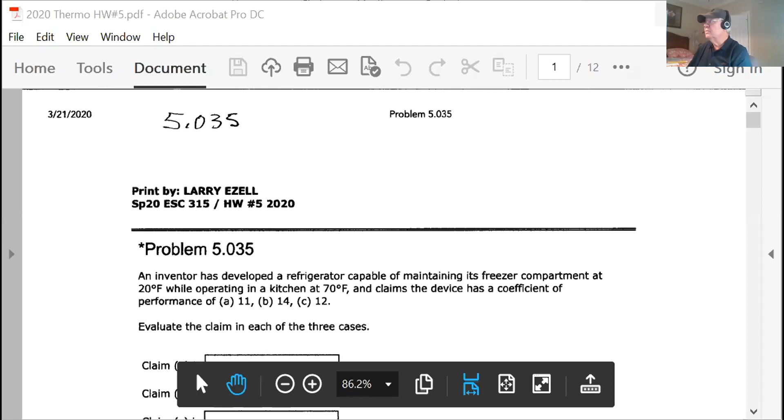Let's see if I can share a screen and share this. Okay. So here's the homework. And like I said, this homework is not hard. Let me move my face down.

By the way, if I didn't say it, I hope everybody is safe. All your families are doing well.

These are not really hard problems. There are a few gotchas because of the sign convention. It's a little bit unwieldy sometimes. So we'll talk about that a little bit. So here's problem 5.035. I'm not working them out, I'm going to go over them real quick, so you might want to have a paper and pencil available.

And as always, the given information in the problem is going to be a little bit different than yours. But the problem says the inventor has a refrigerator capable of maintaining its freezer compartment at 20 degrees Fahrenheit while operating in a kitchen at 70 degrees Fahrenheit. That's usually a freezer you expect to be a little colder than that, but anyway. And the inventor claims the device has a coefficient of performance, and there are 3 different values we want to consider, 11, 14, and 12. So evaluate the claims of each of these.

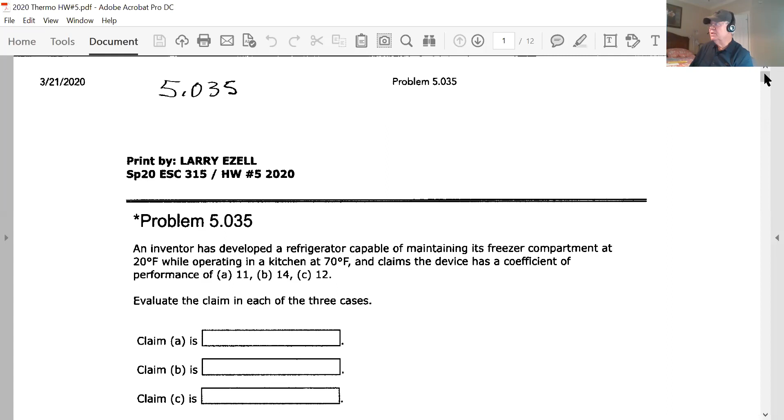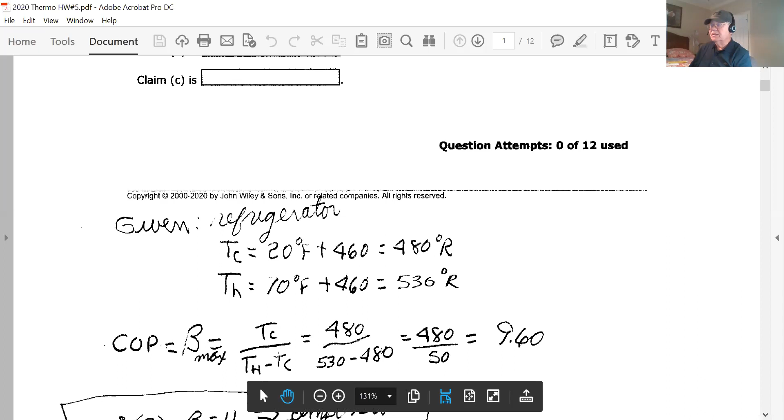So what you do, given the information, you have TC is 20 degrees, at the cold temperature, plus 460. Remember, you've got to get it in absolute. TH likewise is 70 plus 460, or 530. And just apply the beta max. Beta max is TC over TH minus TC. And when you use temperatures, just use the signs exactly like shown in the equation.

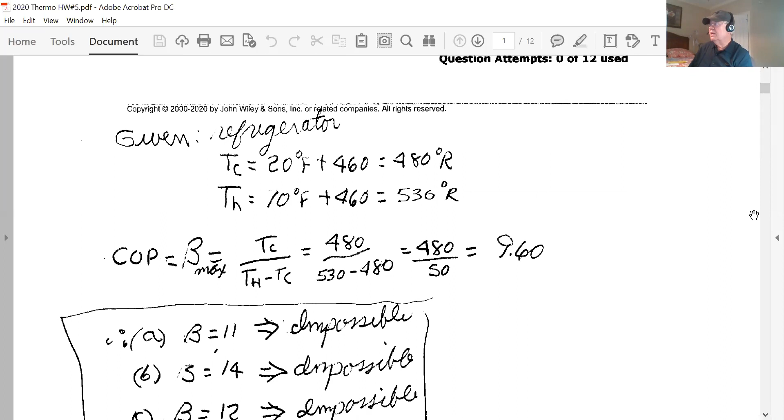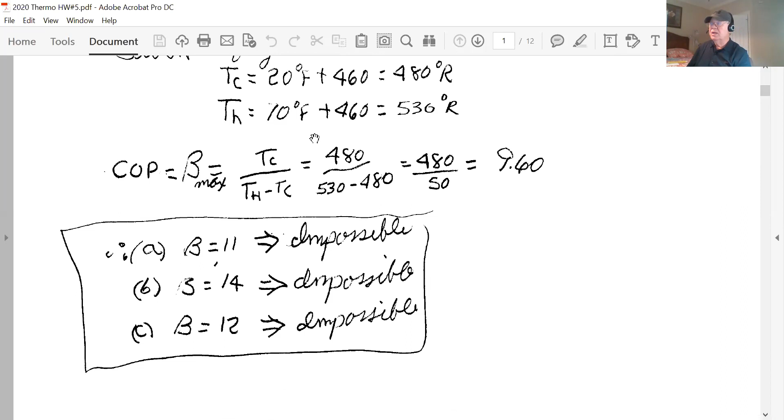So if I solve, now again, on beta max, we use the temperature. These are Carnot temperatures. We do not use the heat transfers. So you have 480 over 530 minus 480, that gives you 9.6 as the maximum coefficient of performance of this refrigerator. And so all 3 possibilities that I was given in my problem, 11, 14, and 12, are all impossible because they claim a performance better than you can get using the Carnot performance. So next one.

This inventor claims to have developed a food freezer that at steady state requires a power input of 0.8 kilowatts. Now remember, always power input, all refrigerators and heat pumps and air conditioners have to have a compressor. And that means you have to put power into that compressor. So all of those power inputs are negative, regardless of what the signs tell you. And I'll mention that a little bit later. So he says that you put in 0.8 kilowatts and you can extract heat transfer from the refrigerated area at the rate of 3,000 joules per second. Of course, that is also 3 kilowatts.

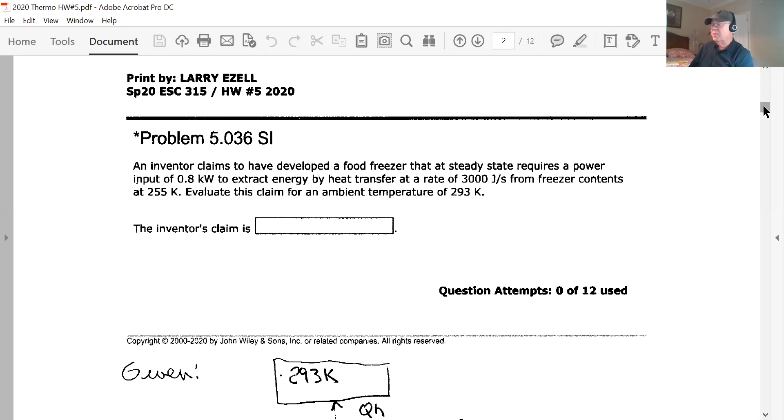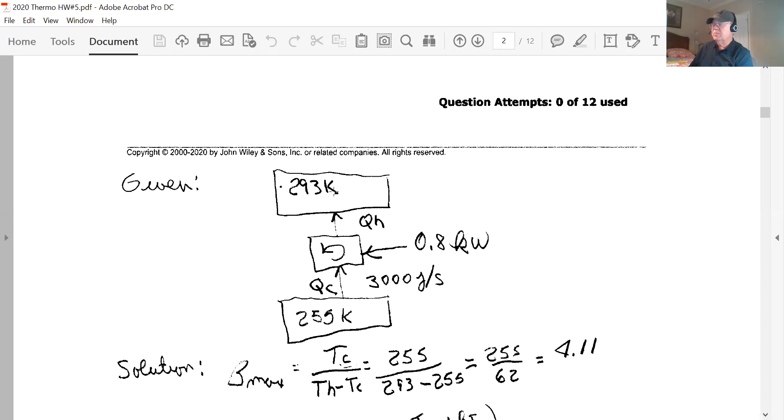And the problem asks you to evaluate this claim for an ambient temperature of 293. I didn't mention on the other problem, but on these type problems, you ought to always draw this little diagram. I call it an energy flow diagram. This is the freezer area. This is the outside area. And this is your cycle in this abstract box. You know you're putting in 0.8 kilowatts of electricity, and you know QC is 3,000 joules per second. That's how much energy you're pulling out of your refrigerated area, going through your system, and then you're going to reject that plus additional energy out to the outside.

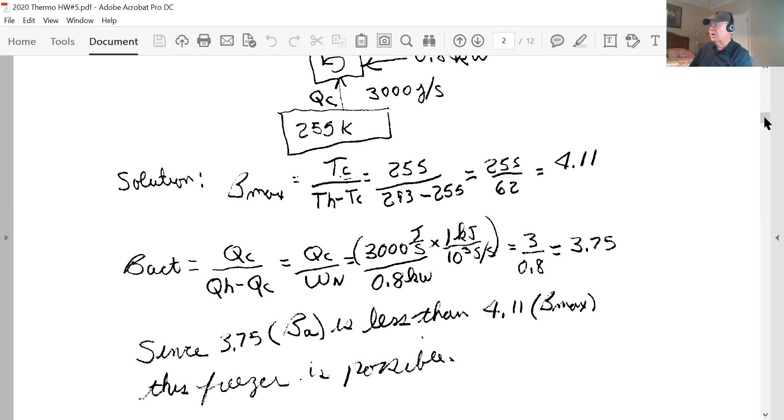So again, let's solve for beta max. You got 255. They gave you the temperatures in K, so you didn't have to convert them. 255 over 293 minus 255. Now, as you know, these temperatures are always subtracted from each other, so they can be in degrees centigrade if you want to. But you go through and you get a beta max, using temperatures now, not heat transfers, of 4.11. Now, that's the best you could possibly get.

So what is your actual? Well, your QC, the heat you pulled out of your refrigerated area, is given as 3,000 joules per second, which is actually 3 kilowatts. QH minus QC, which is also equal to Q net. Now, always remember, this Q net is minus, and I didn't stick my minus sign here, I should have. But if you use QH and QC, don't ever add the two to get a big numerical number. It's always the difference of these two, regardless of whether you get a minus or a plus for the difference. Always the absolute difference of them. And you weren't given these, but you know work net is equal to QH minus QC.

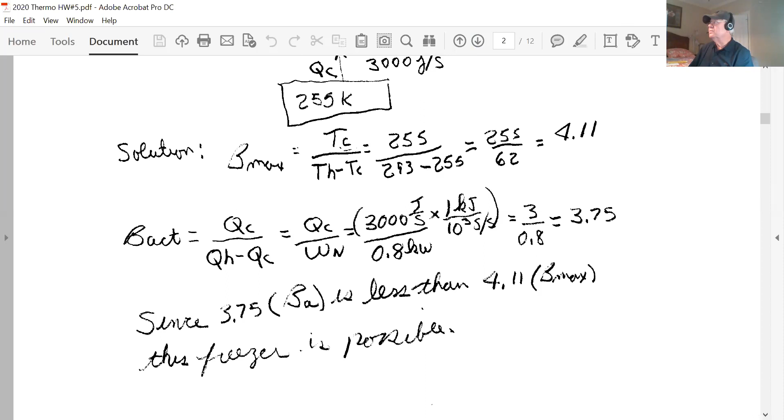And that's because, let me see what I can do here. I apologize for being so poor on this. In any kind of system, the sum of the heat transfers is always equal to the sum of the work in a cycle. So if my heat transfers are QL and QC, then that's always got to equal work net. Now the signs are flaky. You have to take the difference between the QL. That's not right. Sorry. It's QH.

I'll use a capital H this time. QH plus QC is work net. They go ahead and put the minus sign in there, and they'll say work net equals QH. It's confusing, I know. I wish it wasn't like that. But remember, when you use this equation, QH minus QL for work net, it's always the difference of these two. Then the best thing to do is look at your sign, make sure it always comes out with a negative sign. Generally, if you use QH and QL with the sense that we always use, that Q into the cycle is plus and Q out of the cycle is negative, you'll come up with the right value of Q net, but not always. We'll talk about that later.

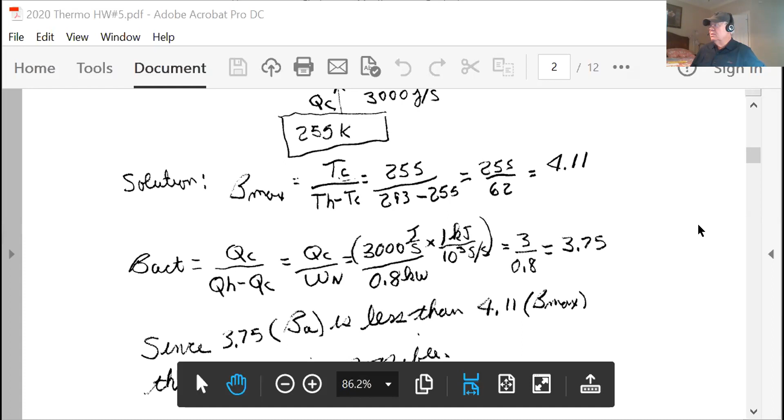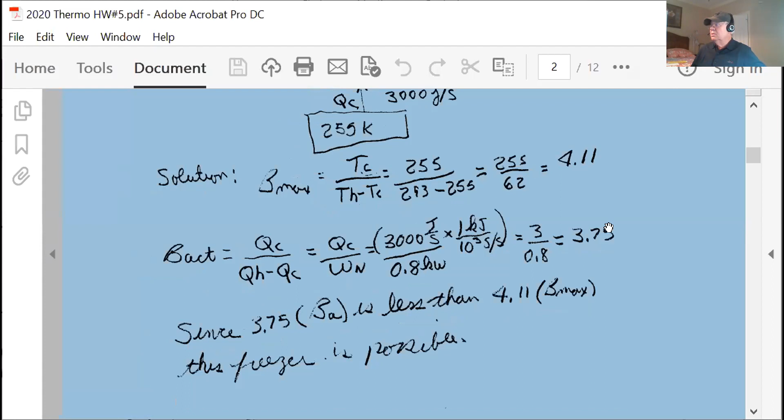All right, let's go back to the homework problem. So plug that in, and I get the actual beta. And remember, it's an absolute value, so you don't have a sign, just put your absolute signs if it makes you feel better. And you get 3 kilowatts over 0.8, or 3.75. And since this beta actual is less than the beta max, then the system is very possible.

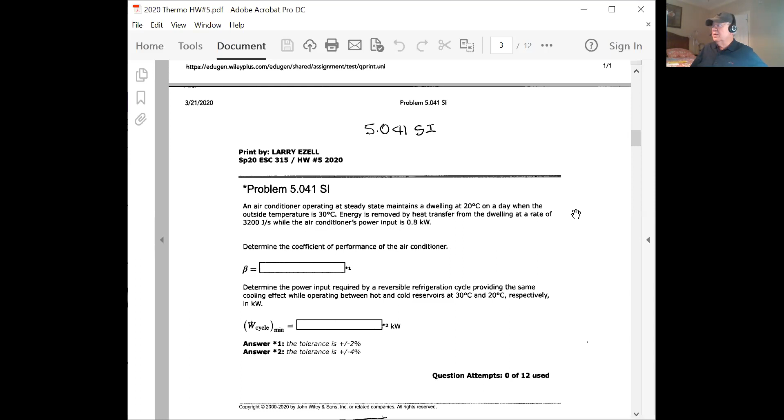Next problem. An air conditioner operating at steady state maintains a dwelling at 20 degrees. So what's 20 degrees? 20 times 1.8 is 36 plus 32. That's 68 degrees F. A little on the cool side, but okay. Energy is removed by heat transfer from the dwelling at a rate of 3.2 kilojoules per second, while the air conditioner power is 0.8 kilowatts. It sounds a lot like the other problem, doesn't it? Determine the coefficient of performance of the air conditioner. So again, these are easy problems.

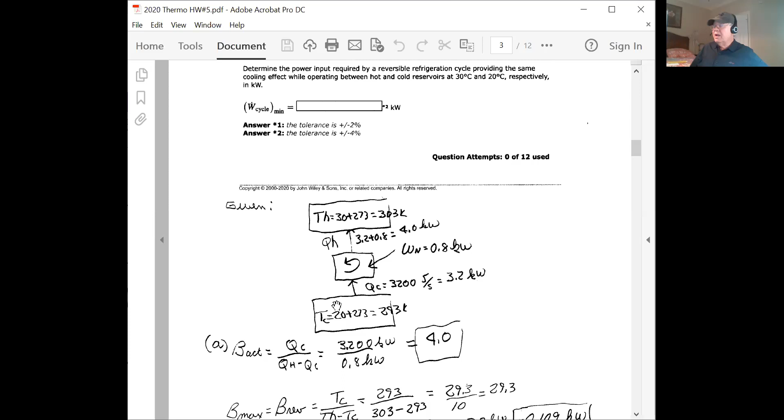Let's draw a little heat flow diagram. I could have been a little neater, could I not? So here's our cycle. Here's the heat we're pulling out of the air-conditioned area. Air conditioner, yeah, okay. So we're pulling heat out of this area and cooling it, and we're giving this heat off to the outside. And as always, if you pull out this amount of heat, that's QC, 3.2 kilojoules per second, which is 3.2 kilowatts. The amount of heat you got to transfer to the outside is going to be the sum of these, 3.2 and 0.8. All right, let's see if we can get beta actual here.

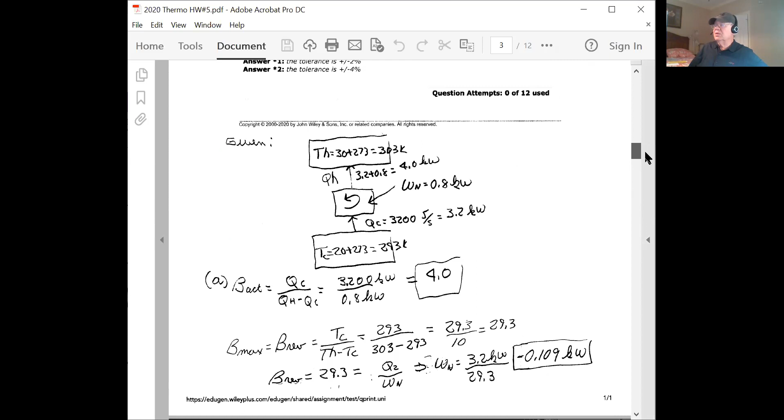Determine the actual coefficient. Okay. All right. So QC was given as 3.2 kilowatts. QH minus QC, which is also work net, was given as 0.8. Now, if I use signage, QC is going into our system, so it's positive. We know work has got to be negative, so we'd end up with a minus 4. But coefficient of performance is always absolute, so it's just 4. Now, I believe the problem also asked you to find the maximum. What did it say?

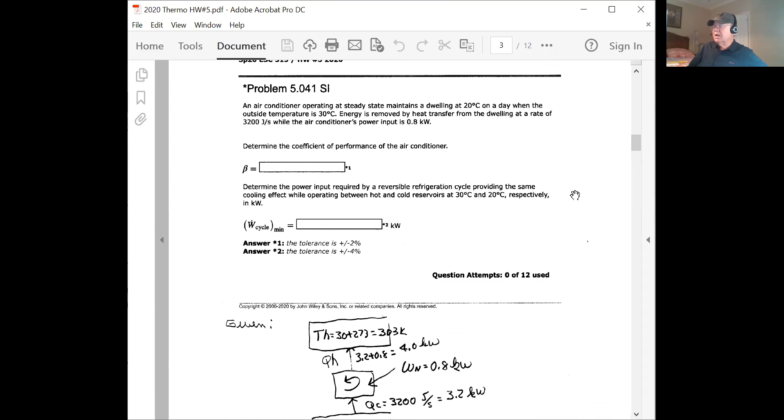Determine the power input required by a reversible refrigeration cycle. Reversible means the best possible case. So what is the beta max? That's also the beta reversible. And again, here we use temperatures. It's an air conditioner, so it's TC over TH minus TC. Refrigerator, TC over TH minus TC. If it's a heat pump, it's TH over TH minus TC. Okay, put in the Kelvin temperatures and I get 29.3.

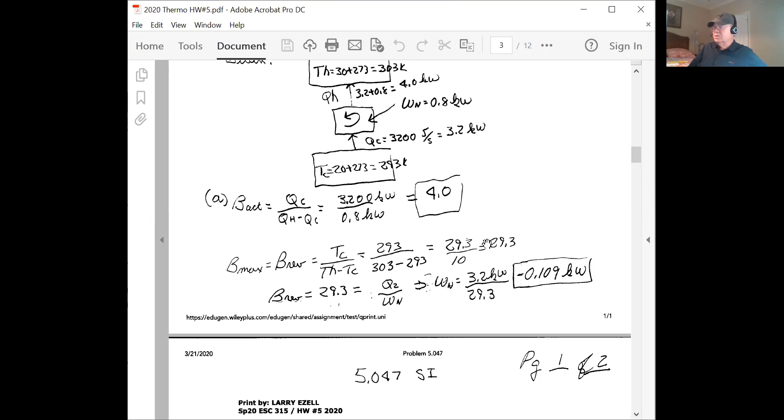Most of these air conditioners and heat pumps in real world operation are not going to be operating anywhere close to the theoretical maximum. But if we could find a fully reversible one that would operate at the maximum, then it asks you how much power you have to put in. Well, the beta max is 29.3, and that's equal to QC over WN. Solving for WN, you get minus 0.109 kilowatts.

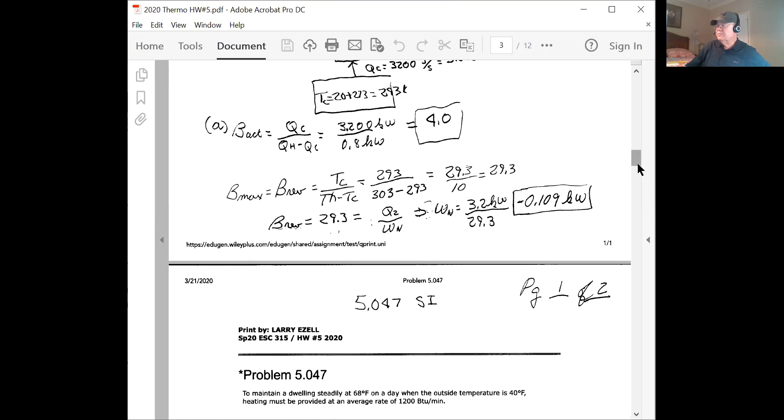Now, when you get this final answer of work, regardless of what sign you come through with, you assign that negative sign. I want to know that you understand that work input to a compressor is negative. Again, air conditioning, heat pumps, the work is always negative. Okay, all right, let's go to the next one. Like I said, it's hard to make these problems hard.

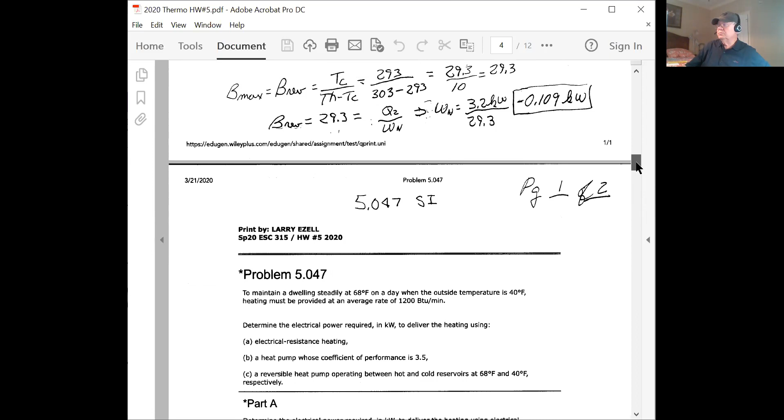Problem 5047. To maintain a dwelling steadily at 68 degrees Fahrenheit on a day when the outside temperature is 40 degrees. Okay, we've got a heat pump here, outside's 40 and we want 68 inside. Heating must be provided at an average rate of 1200 BTUs per minute. What that means is that's how much heat you have to continuously pump into your dwelling to maintain the temperature of 68 degrees.

In other words, the heat loss from your dwelling is 1200 BTUs per minute. So if you put in exactly the amount of heat that you're losing from a heat pump, you'll maintain the temperature. Determine the electrical power required in kilowatts to deliver heat using electrical resistance heating. What we're pointing out here is how much more efficient a heat pump is than electrical resistance heating. Part B asks how much power you would have to put in a heat pump whose coefficient of performance is 3.5. Now 3.5 is absolutely real world. That's typical of a good heat pump nowadays, even higher.

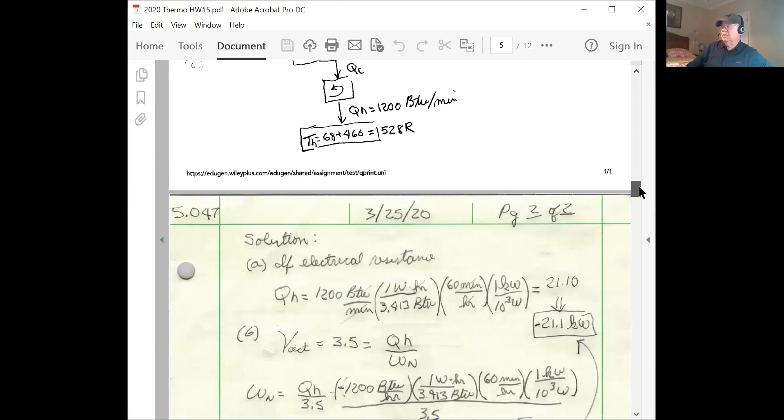QH now is negative. It's going out of the system here, so it is negative heat transfer. So I put the minus sign in there. I really should have put the minus sign right here, because it is heat going out of the cycle right here. Heat going out into the conditioned space.

So if I go through the calculations, minus 1200 BTU per minute, now I get to divide by 3.5, my coefficient of performance. So if I go through this same thing, I get minus 6.03 kilowatts. See how much less energy the heat pump uses than pure electrical resistance heat. Of course, as I pointed out before, the heat pump has some other disadvantages based on what temperatures you're operating at, whereas electrical resistance heat always gives you the 1-for-1 no matter what. So the ratio there, of course, is 3.5.

Now, what about a reversible heat pump? With a reversible heat pump, since it says reversible, that's the best possible, limited only by the temperatures. So it's TH over TH minus TC. And I get 18.857. Well, that's certainly about 5 times the 3.5 of a real system.

Now we're trying to find the work. So we know that gamma max is equal to QH over QH minus QC, which is equal to QH over the net work. We know that net work is negative, so we should come up with a negative answer. And when we do, in this case, we put minus 1200 BTUs per minute for the heat, divided by 18.857, we get minus 1.119 kilowatts. Of course, that's the theoretically possible. Of course, we got nowhere close to it.

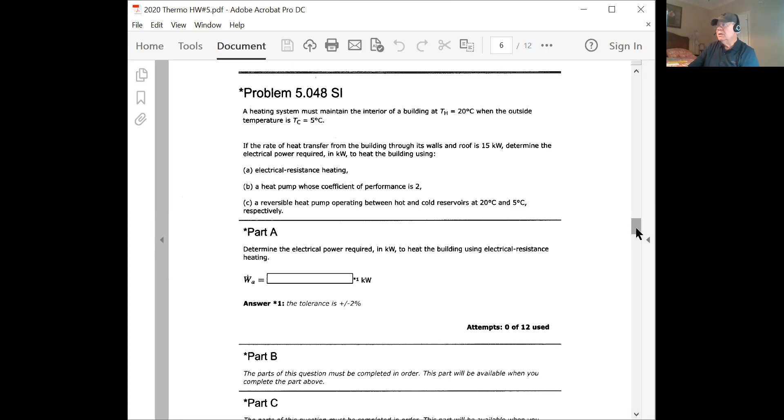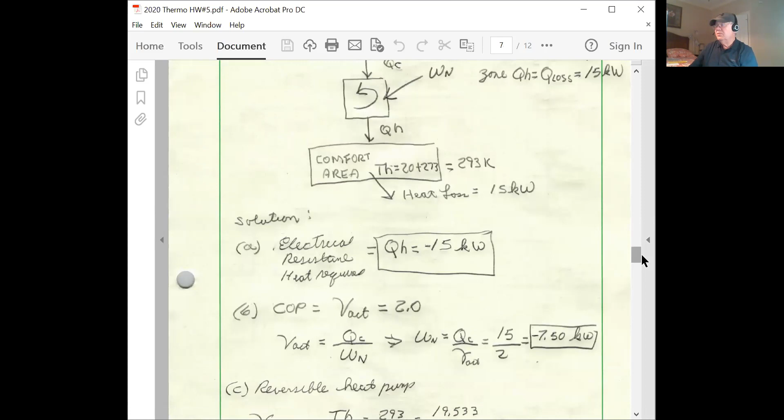So in the same situation, the problem wants to know the electrical resistance heating. Then a heat pump whose coefficient is 2, that's not a very good heat pump. And then the fully reversible Carnot type heat pump. So in part A, it's just 15 kilowatts. It's already given you the heat loss in watts. So the amount of heat you put in is 15 kilowatts. And QH is heat flowing out of the system, so it's minus 15 kilowatts to get the proper sign.

Now, warning, I don't know how Wiley Plus is going to handle your sign. I forgot. I put in all of my signs and I got all the answers right. I don't remember having to change, but if you put in what you think is a right number and Wiley Plus won't take it, then it might be because it needs a minus sign or doesn't need a minus sign. So 15 kilowatts, here's a little diagram. 15 kilowatts going out, you need 15 kilowatts coming in from your heat pump. If you're heating it with resistance heat, then it's 1 watt of heat for 1 watt of electricity. So you need 15 kilowatts of electrical energy.

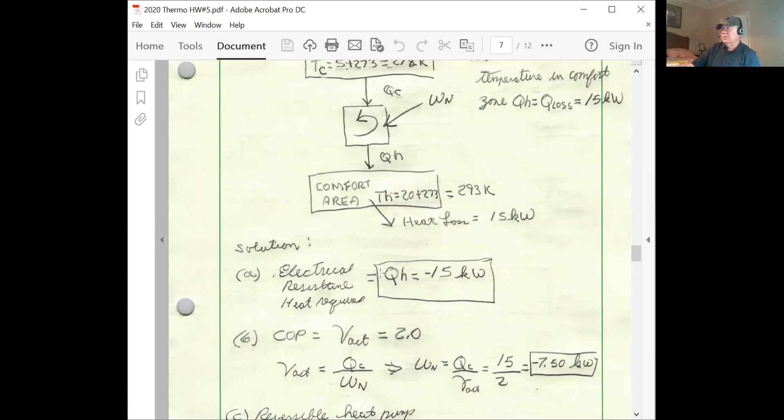Now let's look at a heat pump with a gamma of 2. Well, gamma actual is equal to 2. That's equal to QH, I'm sorry, that's wrong. That's QH over WN. I put the right number in, but wrote the wrong symbol. So if I put QH in now as a minus 15, it should be a minus 15 there. Divided by 2, I get a minus 7.5.

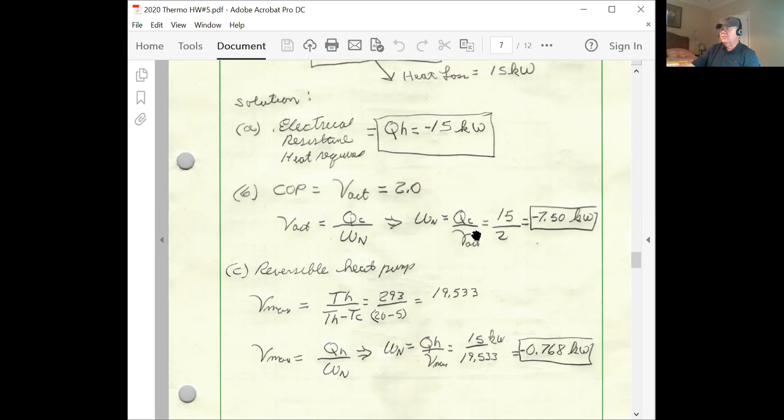Now, even if you don't have the signs right here, I'll give you credit if you realize that at the very end, you have to have a minus sign. I should have been more careful and put a negative sign here, just like I did up there. My mistake. Now, C, what about with a reversible heat pump?

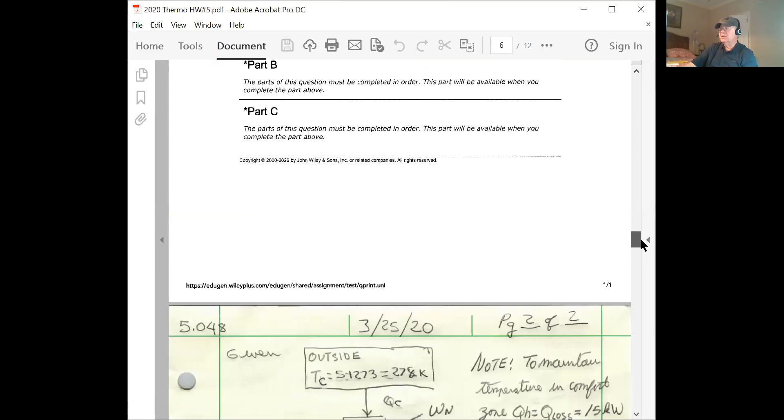Now I switched to temperatures. And that's because I don't want to get off the subject, because if you had a reversible situation, there'd be no irreversibilities due to heat transfer. So that means if you had a 293-degree TH, it would be able to pump in the heat it needs. Let's see, where's TH? With no temperature drop. So that's why, in that type of ideal world, your heat transfer is directly proportional to the temperature. In other words, QH is directly proportional to TH.

QC is directly proportional to TC. So if you think about it a minute, you can drop the Q's out and have TH times some proportionality constant. If that proportionality constant is true for the numerator and the denominator, which it would be, then you would end up with TH over TH minus TC, instead of QH over QH minus QC. It's an ideal situation, never really happens.

So TH is 293, TH minus TC, I don't really need to convert those. I just look up there and I see it's 20 and 5, 20 minus 5, so I get 19.533 for the gamma max. And then I know gamma max is QH over work net, and I just solve for work net. I know QH is 15 kilowatts, gamma max is 19.533, and I should have the minus sign right here to be consistent. But at the end, I did realize I need to put my minus sign.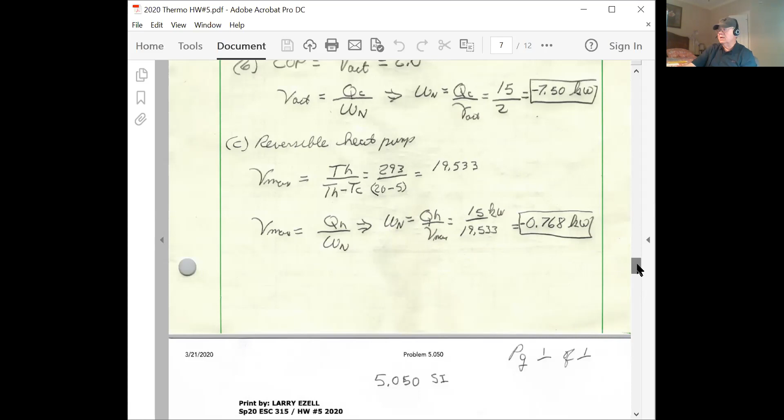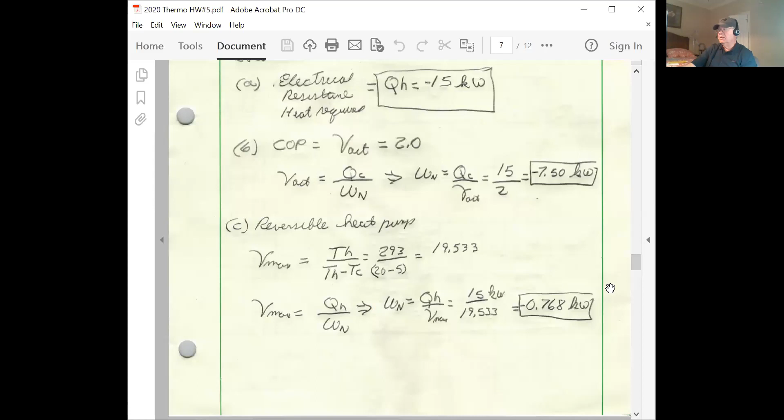You guys practice that, putting the right signs in, and let me know how it works out. Maybe I'll go back and modify these to make sure I put in the right signs. In other words, this 15 kilowatts is leaving, going out of the cycle, so it should be negative, going out of the system or out of the cycle. This QC coming in is positive, and the work net going in should come out to be negative.

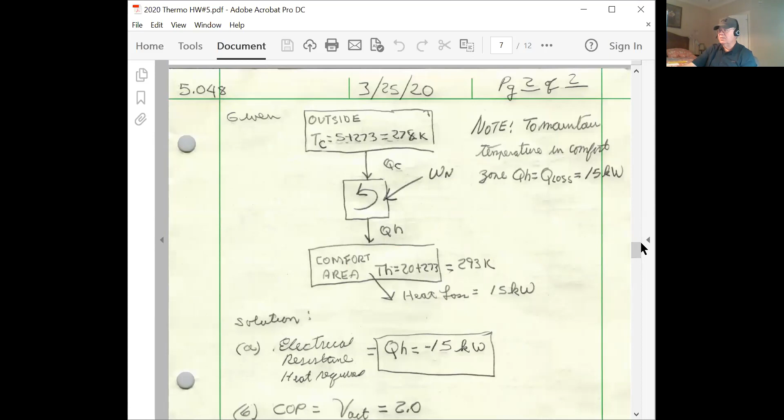Now, here's a reversible heat pump. That's actually a Carnot cycle. You see it consists of a compression from 1 to 4, that's an adiabatic compression, by the way. Heat transfer is 0, no heat transfer there. Then an isothermal process where heat is transferred, isothermally, the temperature TH is constant. Then an expansion down to TC, and TC is constant. We start off at TC, went up to TH, constant TH, down to TC, constant TC.

And it says it's a reversible heat pump. State 1 is P1 of 14.7, P4 is 34.7, V1 is 12.6, that's specific volume, cubic feet per pound mass, and V4 is 7.0 cubic feet per pound mass. The gas is air, obeying the ideal gas law. And okay, the first thing it wants is TH.

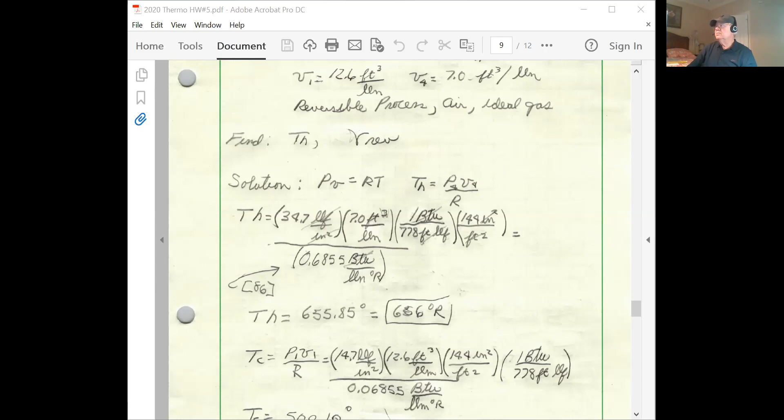We're given this, and this is a constant for air. You just need to look up the right English. So we've got everything. We just need to solve for T. So TH is the high temperature. That's state 4. So we're given P of 34.7. Specific volume we're given is 7 cubic feet. It's just messy dimensions, but it's just plug and chug as far as the calculations.

1 BTU is 778. Now I realize that the sheet we have says 778.3 or something like that. I've been using 778 for 50 years. Too late for me to change. And you won't affect the accuracy this time. You won't get in a situation where I'll subtract a point off because you didn't maintain accuracy. And 144 square inches in a square foot. If you put all that together, now you look this up, that comes from page 86. That's that sheet I gave you with gas constants. So you just look over for air and look over for the English units.

So the gas constant for air is 0.06855 BTUs per pound mass degrees R. And if you get everything right, everything will cancel out except the degrees R, and you'll get TH is 655.85 degrees, which around then is 656 degrees R. Now subtract 460 from that. What's that, about 200? That's 196 actually. So the temperature in Fahrenheit is 196 degrees. But again, ideal gases, we use absolute temperatures. And also, this is an English unit problem.

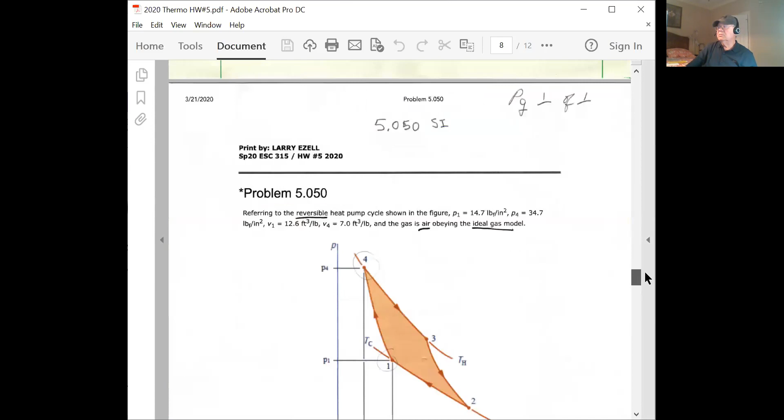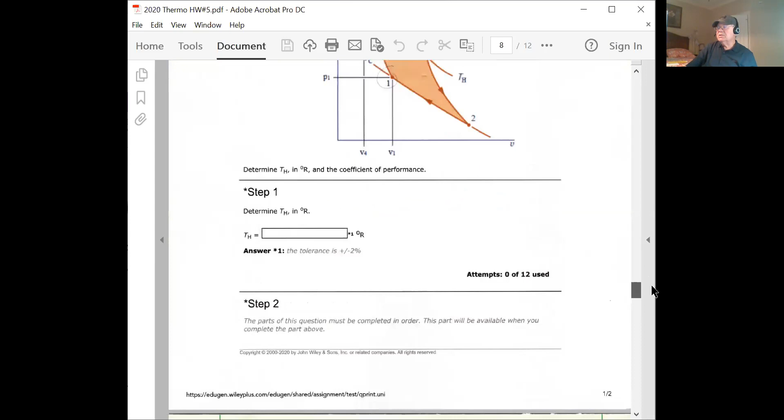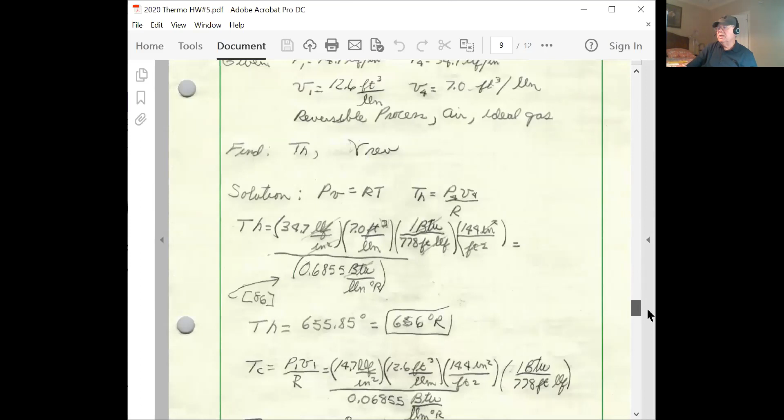Step 2, the coefficient of performance. It said the actual coefficient of performance. Ooh, I didn't do that right. Oh, it said it's a reversible. Okay, that got me out. That means it's the best that you can get. So you use absolute temperatures. Gamma max is only limited by the temperature extreme you operate in between.

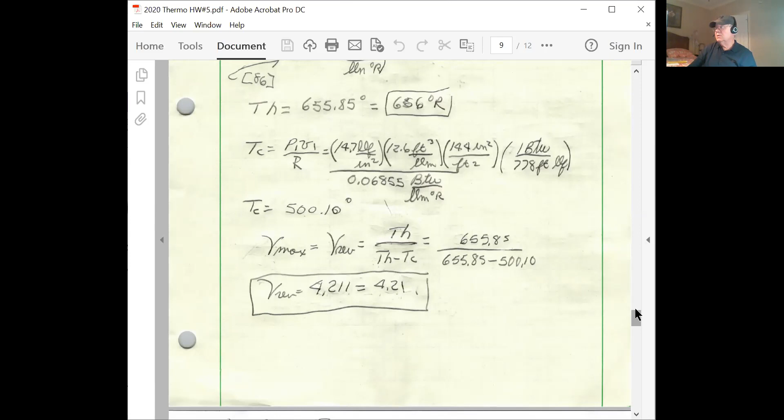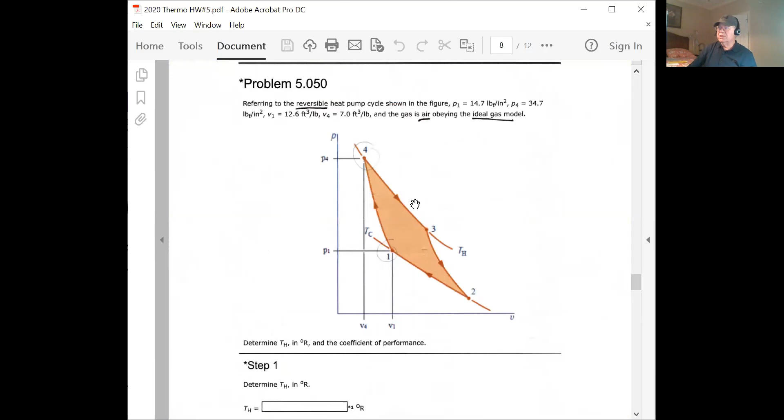So it's TH over TH minus TC, and that ends up 4.21. Not that great, but you don't have a very big temperature range here. No, actually you do. Let's see. This is not a real world heat pump, this Carnot thing. It's just to illustrate these expressions and relationships.

And now here's another one. I didn't like this problem either. It's not real. Again, this is a Carnot cycle. How can you tell? Because these two processes at top and bottom here are at constant temperature. That means it's a Carnot cycle. It says the figure shows the schematic of a vapor power plant. We'll start at state 1. We go through a boiler, and that's got to be saturated vapor. And then we go down to a quality of 88% right here, going through the turbine.

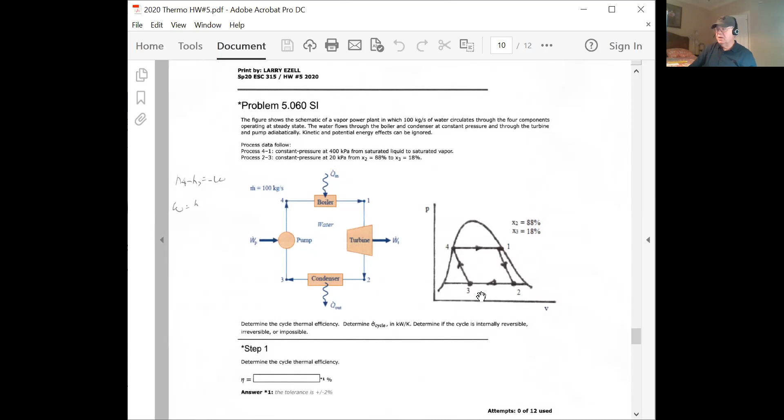Then we go through the condenser from 2 to 3, and we decrease our quality. We go to more and more liquid, to where we only have 18% vapor by mass. Then we pump up to a higher pressure. This lower pressure was 20 kilopascals, and the higher pressure is 400. Those are not realistic pressures. So that's our cycle, and it wants to know what's the efficiency.

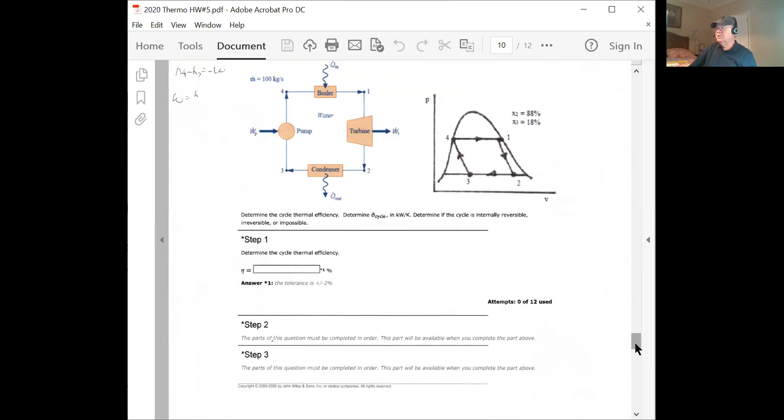Now these numbers are a little flaky, I'll be honest with you. I've heard it said when anybody says I'll be honest with you, you know they're not going to be honest with you. Well, that's probably true for a used car salesman, but in my case, I am being honest with you. I shouldn't say that.

All right, given the schematic of the previous page, we're given that m dot was 100 kilograms per second of water. That's a lot of water. P4 equals P1, that's a higher pressure, 400 kilopascals. That's only 4 bar. Remember, a bar is 14.5 psi, so that'd be about 58 psi. That's not a very high pressure. P2 is 20 kilopascals. That's well below atmospheric.

So what I did is I decided to just go through the whole thing, pull all the enthalpies up and calculate all the values of the cycle, the works and the heat transfers and so forth. I looked at the solution to this after I got done. The guy did it real cute. He didn't have to look up but an enthalpy or two, but I think this is more straightforward. But you're asked to find the thermal efficiency of the cycle and the sigma of the cycle.

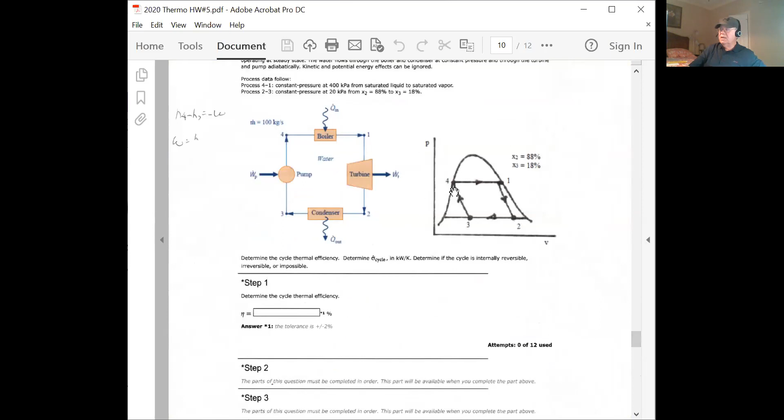So I can look up H1, which is just Hg, H of gas at 400 kilopascals. That's 2738.6 kilojoules per kilogram. H4, I'm sorry, H4 is saturated liquid. So H4 is Hf at 4 bar, 604.74 kilojoules per kilogram.

Now I've got to calculate H2 and H3. H4 and H1 I got right off the table, easy lookups. For H2, we're given the quality is 88% or 0.88, so I can calculate H2 from the quality equation. H3, same way. We're given the quality is 18%. So it's Hf plus 0.18 times Hg minus Hf, which is also Hfg, which is calculated for you in the tables.

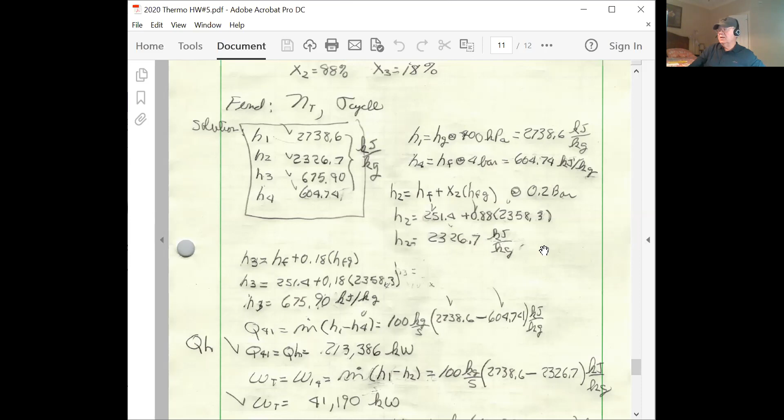First thing I calculate is Q41. That's the heat transfer in, QH. It's just m dot times H1 minus H4. And I make sure I have these proper. What I'm saying is, let's go back to here. Let's get rid of this. Erase it.

All right. If we write out our energy equation for a single inlet, single inflow and a single outflow, we would have,

Draw, we would have, whoops. What am I doing wrong here? I don't want to insert. I don't know why it's selecting that. I don't have shapes. Why am I not getting the pen? I know, because I wasn't doing it right. Okay. Sorry, you can fast forward through this.

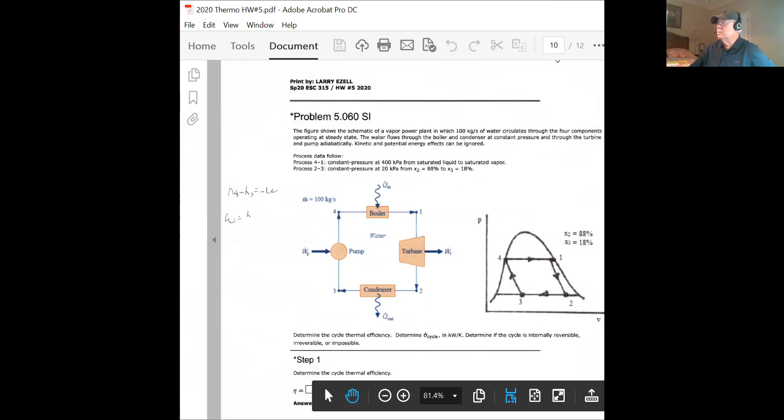I wish I could bring them up at the same time. Maybe if I bring it way over here. Sorry.

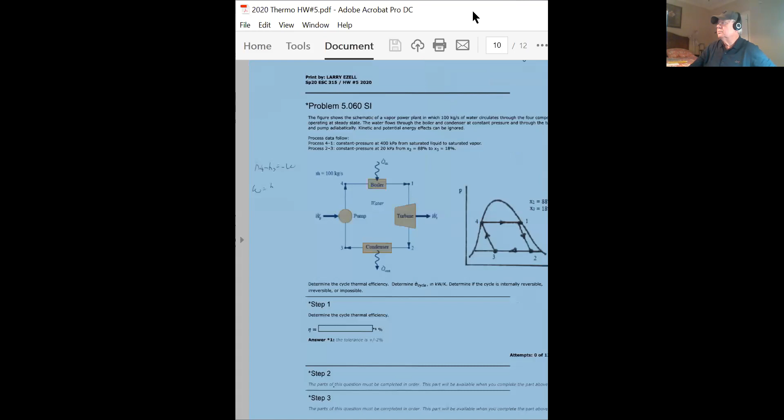So our second H, or outgoing H, is actually H1. So applying this equation to this, we have m dot, the outgoing H from the figure is H1, and the incoming H is H4. And that's equal to the heat transfer. We call it from 4 to 1. So you can see that H1 is a lot higher because it's coming out of the boiler. So you're going to get a plus sign, and that's exactly what you should get.

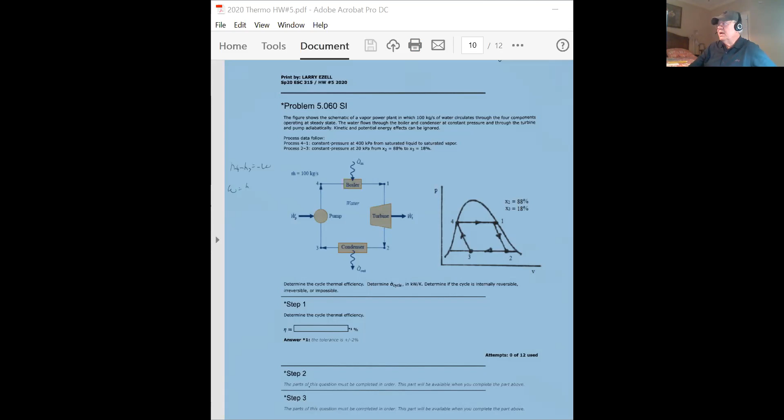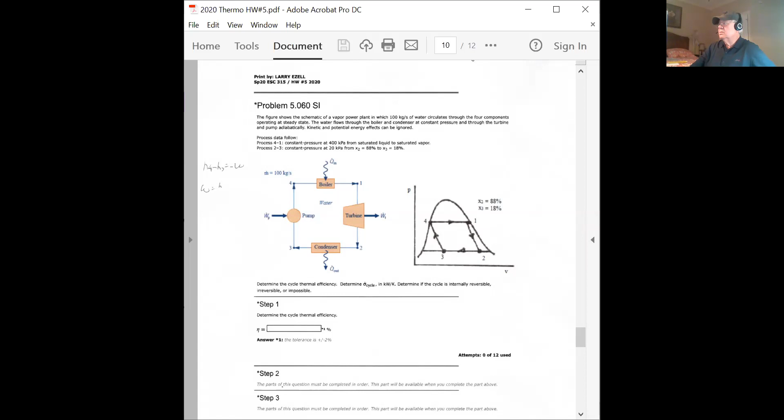I'll get better about it. So, H4 to 1, there we go. m dot times H1 minus H4. H1 is a lot bigger than H4 because it's coming out of the boiler. That's going into the boiler. And I got 213,386 kilowatts, which is 213 megawatts. That's a lot of power, Q41.

Now let's get the work of the turbine. Now let's go back and look at this again. Look at this equation. In this case, the work of the control volume is the work of the turbine, and the heat transfer is 0 through the turbine. So in this case, let's lasso this and get it out of here. Missed a little, didn't we?

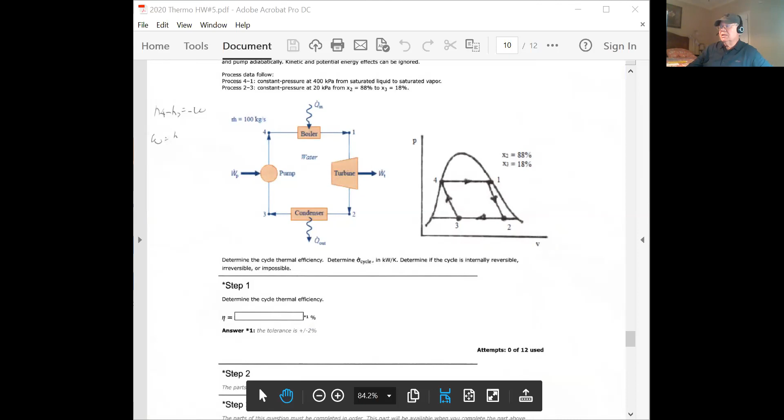See, these are not complicated equations. Put it on the other side, and it's going to be H1 minus H2. And I think that agrees with our subscripts, does it not? Let's see. I think it agrees with our subscripts. Yep. That's through the turbine. 1 is into the turbine, 2 is out. So that's our exact equation for work of the turbine. So what did I get? I got 41,190 kilowatts.

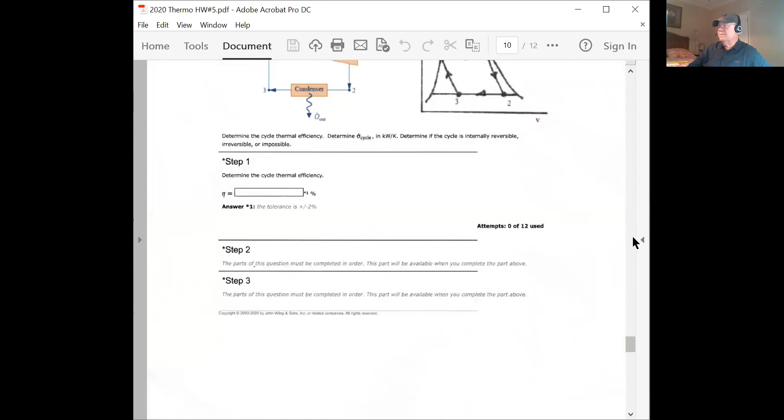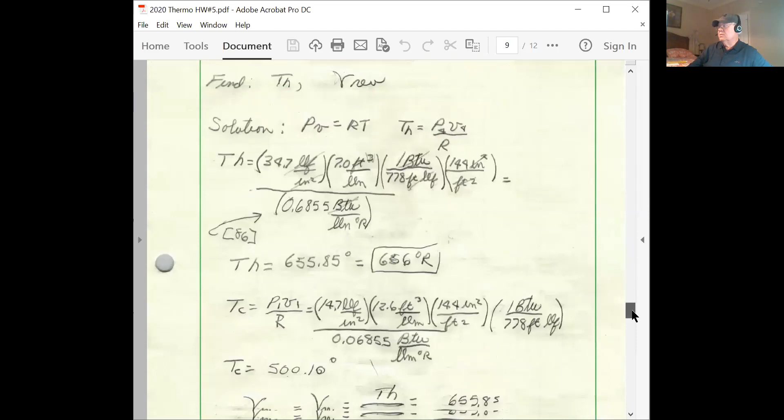Now let's look at the heat transfer QC going out. Using the same type of approach, Q of 2,3, which I labeled QL here, should be QC, is equal to m dot times H3 minus H2, and that's going to be a negative, minus 165,080, and it should be negative because that's heat coming out of the system. That's heat coming out of the cycle, I should say.

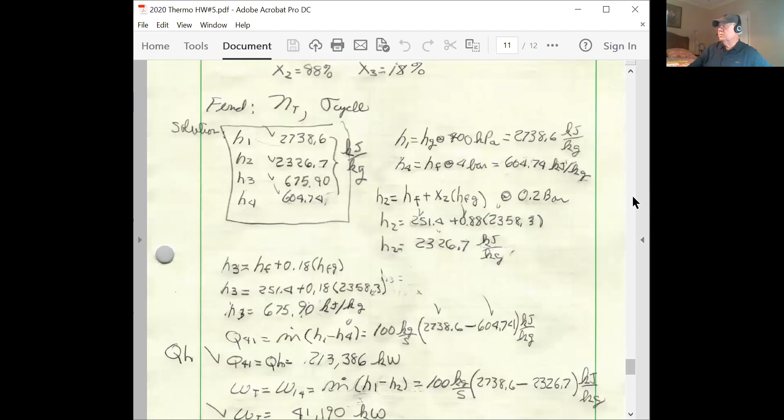So it's negative. And I also, by the same token, went and calculated the work of the pump. When I got the work of the pump equal to a positive, indicating you're actually using the pump as a little turbine, I knew that was bogus because of the given values of the problem. So I didn't feel like using that work of the pump in the solution. Dang, I'm sorry. So then I went and did it this way.

All right, I'm trying to find the actual thermal efficiency. Well, I know it's equal to the work net over QH, but remember, work net is QH minus QC, over QH. And that's QH over QH minus QC over QH. So that's 1 minus QC over QH. And at this point, I could put in the numbers I got for QC and QH, which I could have done.

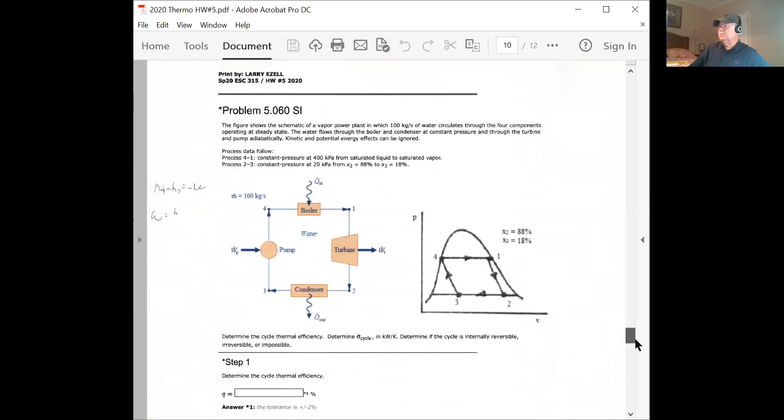But now I just put the ratio of the expressions for QH and QC. Well, I see I did that, then I actually brought the numbers back. Okay, that's all right. So QH minus QC over QH is, where did I get the 165,000? QC is 165,080.

I've got to check that. I put it in again right now. That looks a little like QH minus QC. Oh, I'm sorry. 1 minus QC over QH right here. 1 minus Q, you probably saw that before I did. 1 minus QC over QH.

Although QC is minus and QH is positive, you've got to end up with a minus here. You've got to be well under 1. This is one of those cases where you have to check your signs. If QC is a negative, a negative times a negative would be a plus, so you would get 1 plus QC over QH, which you know cannot be right. It has to be a 1 minus. The signs get flaky, I'll agree with you.

So it's 1 minus 165,080, which is QC over QH, and you get 22.6% as the thermal efficiency. Not very good. Dang.

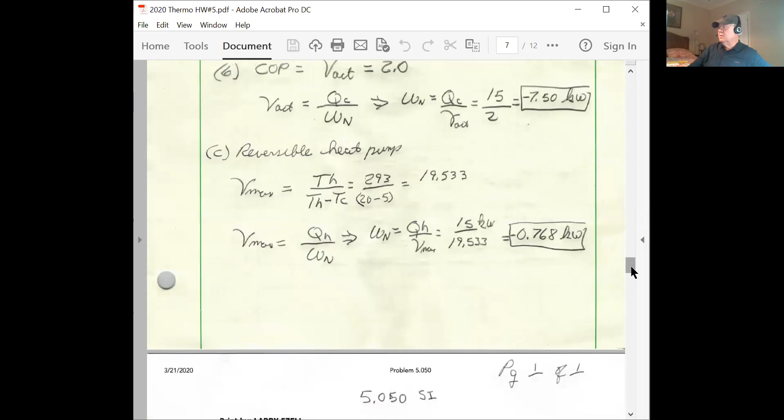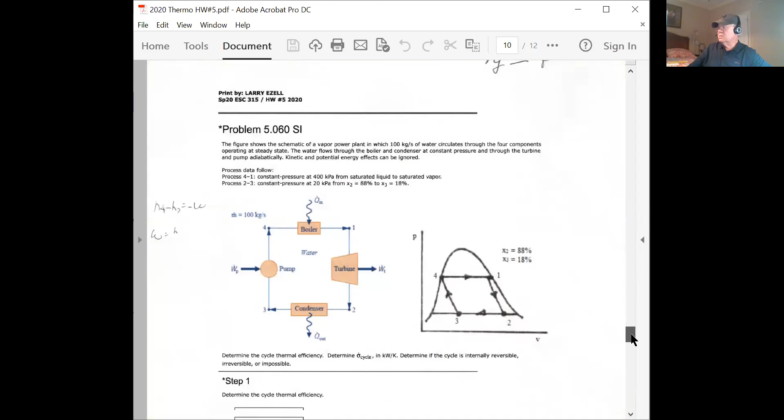I wonder if I could do that. Yeah. Oh, okay. I'm sorry, I'm jerking you around. I'll get better, I promise. I should have been using my cursor, just my down key.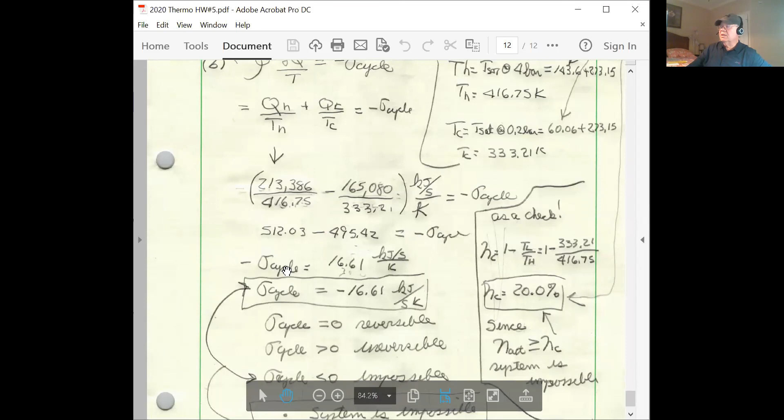So if I go through that, I get minus sigma of the cycle is 16.61, or sigma of the cycle is equal to minus 16.61. This has to do with entropy, and we'll talk about this a lot later, next chapter. So I've got sigma cycle is less than 0. If I look down here, my three possibilities are: sigma cycle equals 0, it's reversible. It's a perfect system, you might say. Donald Trump would call it a perfect, gorgeous, beautiful system.

If it's greater than 0, that's irreversible. That's the typical. It's what you get every day. If it's less than 0, it's impossible. Well, we got less than 0, so our system's impossible. We violated the second law of thermodynamics.

Now, as a check, I decided to look at what the Carnot efficiency is if I use 1 minus TL over TH, instead of using this criterion. If you go through that, you get the Carnot efficiency is 20%, which means nothing in the real world can beat that. That's the reversible efficiency. So if I get 22.1 for this cycle here, it's bogus. That's why some of the numbers look so flaky, but it's bogus. It's not a real world system. The guy made this up just to test us.